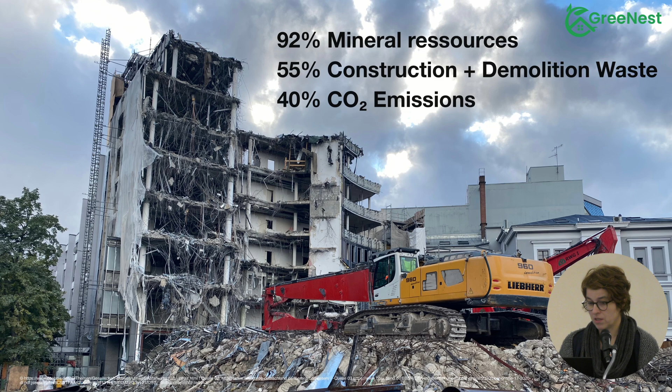Material extraction, the production of construction materials, and heating buildings cause a lot of CO2 emissions. This 40% is the smallest figure, but it's giving us a headache, and we need to bring this down. This relates mainly to the production of construction materials, so we need to find a way to overcome these issues.

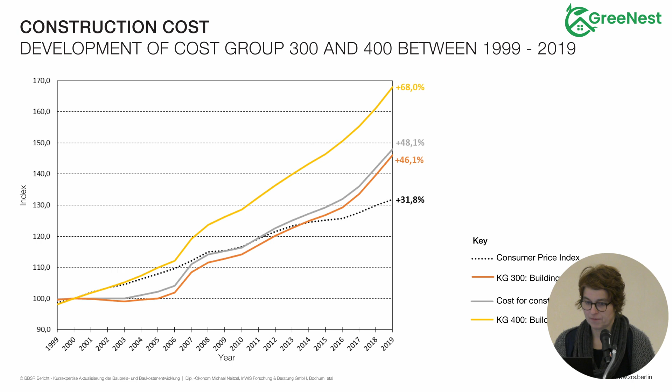We always ask: has the quality of the living spaces increased because of that? We feel it hasn't. We put a lot of kit into our buildings because as architects we've lost some of the knowledge of how to design a building properly. We often design glass facades, then ask the mechanical engineer to resolve the issue of keeping it warm in winter and cool in the increasingly hot summer months. This really concerns us in our office, and we discuss it with our team and with research teams from the university.

What is architecture able to do about all these problems? Through the discovery of oil, we could suddenly construct higher and wider, building these glass facades, but this isn't going in the right direction. Knowing the world population is increasing while our resources are depleting, the question is: how does the architecture of tomorrow look?

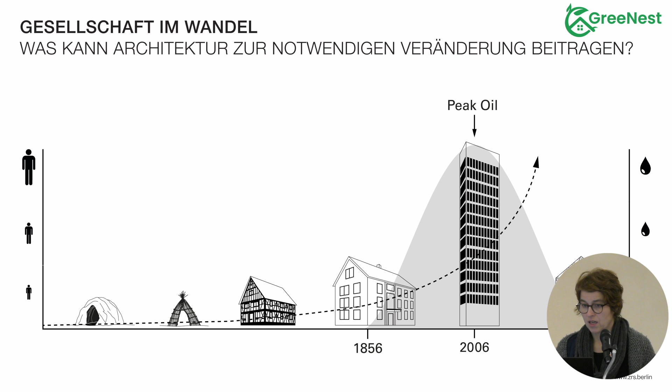So in the office, we're still developing this scheme since it hasn't reached its final form, we try to develop a building system that addresses these issues. This is based on historic construction. It's good to look back in history, because when there wasn't so much technology, and access to material was difficult without all the machinery, people knew how to connect materials together to safeguard and rescue them from other buildings.

The thinking behind this is that we look at historic construction like a wattle and daub house—timber and earth as the main materials—because we know these houses have been quite comfortable: warm in winter, but also cool in summer. This is the construction system we used, translated into modern construction.

We use a lot of timber where we can in the structural support system. We try to avoid basement constructions, because for basements and elements connected to the ground, we always need concrete, and we know the CO2 emissions related to concrete are quite high. So if you avoid car parking spaces below ground, you can do a lot for climate-positive buildings.

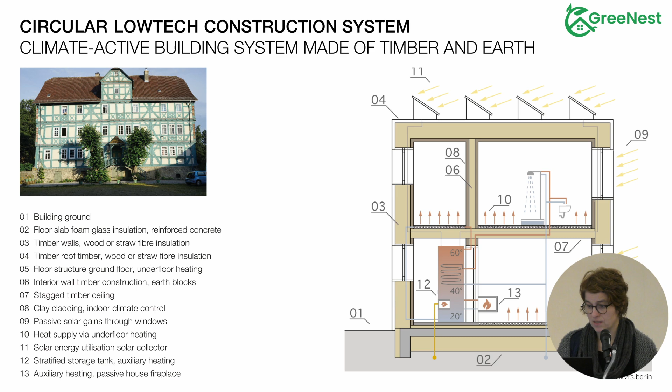We also use a lot of earth where we can. In this building, it relates more to high thermal inertia in the internal partition walls. We keep a glazing ratio that isn't too high, relating to the building's orientation and location—in the south, like Greece, you'd have fewer window openings, whereas in cooler climates where you need more daylight, you can open up a bit more, but these glass facades are really difficult. We also try to implement renewable energy sources to heat our spaces and provide electricity. This is where we come from and what we try to implement in our projects—in some we achieved more, in others less.

It's always a bit of a debate with the clients, and at the end of the day sometimes it relates to cost. So we'll show you different projects, two from the office, and Eike is also showing what we're going to develop in the GreeNest project.

When we started with the design development, we talked to the local authority because we actually wanted to construct the building slightly higher in order to minimize the footprint. But due to urban planning regulations, we weren't allowed to build higher.

So we approached the local authority and said, why don't we think about a building that's dismantlable after time? Because maybe in 50 or 100 years we'll have a different density in the north of Berlin, since the city is still growing.

So the idea behind this overall concept is to be able to dismantle the building if needed. The local authority was quite open to this, because planning takes a bit more time and a bit more cost. But they said, overall we'll gain a lot from this concept, so we buy into this idea. We started first with the overall plan.

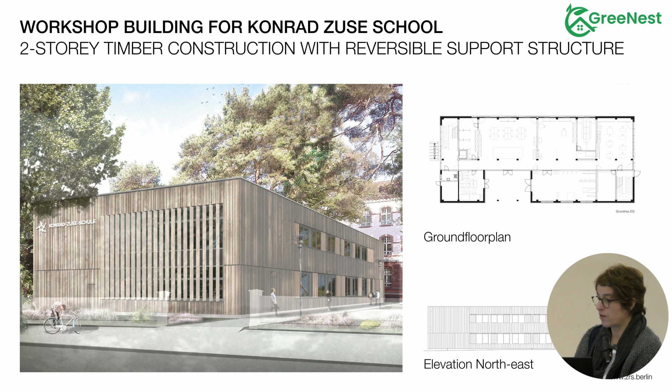For instance, if in 50 years there's a need for more residential schemes, you could change the facade, because the current facade might not relate to residential buildings. We avoided a basement, and had a floor slab made out of concrete.

We didn't manage to use recycled concrete at the time - this was a cost issue. It would have been better to avoid new aggregates, but that wasn't possible. What you can see here is the structural system as a skeleton, and the entire organization.

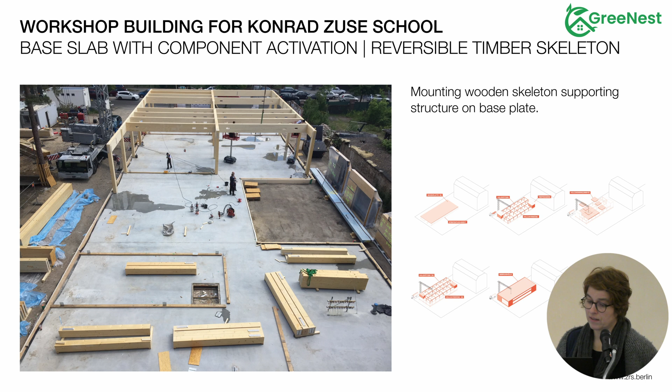The planning was a bit more time consuming, but the assembly on site was really, really quick - the entire structural support system was erected in 20 days. So at the end of the day, it pays off to put more thinking into the planning process, so it can be constructed more quickly on site.

I'll show you a few details that our engineers developed together with us, also inspired by a EU research project. This, for instance, is the connection of the columns.

with a floor plate that you can mount on the ceiling. It's laid out so that we only have vertical loads, and it's just a stacked connection - simple to place together and to detach if necessary.

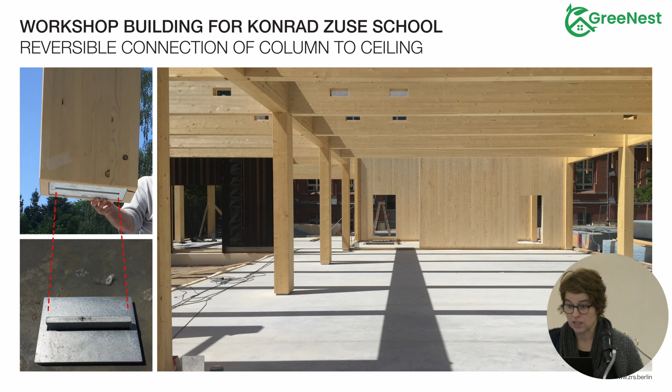The same was developed for the beams, both main and secondary. Again, it's very quick to install on site. You have to secure it through screws, but you can dismantle it again after 50 or 100 years.

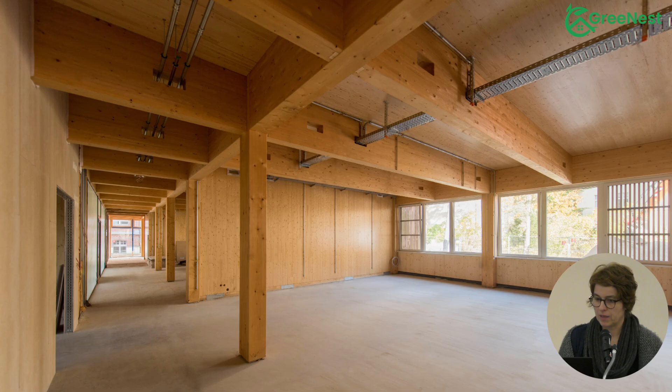We developed a lot of these details in order to be able to dismantle, and despite such reversible connections, we were still able to create quite large spans - the span from column to column is 9 meters, so you can still have very flexible, large-scale spaces.

Also for the facades - and this is what we're trying to implement now in the GreeNest project - we developed a rear-ventilated facade system, again based on timber. We brought in wood fiber insulation, and again you can dismantle the facade, because it's often not as durable as the structural support system, or you may need to make changes to it, and that's also doable.

The idea here with the weatherboard was to use waste wood and to employ the students to mount this facade, but unfortunately we didn't achieve this. It would have been quite a nice idea to bring the concept of reusing timber into the project on a smaller scale.

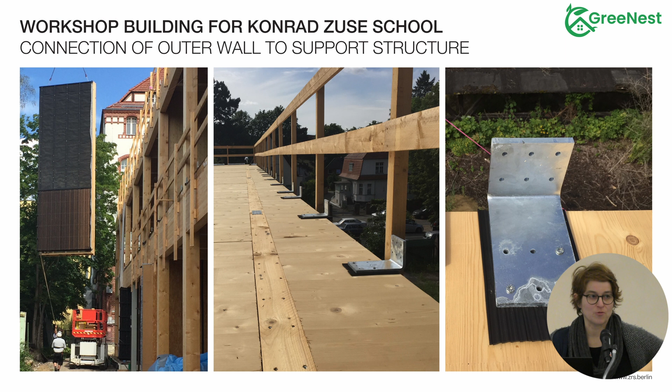This is how the building looks today. We have an appropriate glazing ratio and night time cooling. These timber louvers are screens where you can open the window, which is really good for providing a good environmental climate in summertime. It doesn't overheat, and we can still protect the building from birds or animals entering during nighttime.

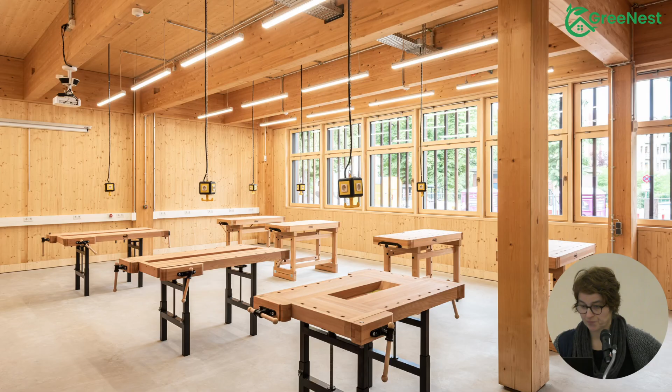This is how the spaces look finally. We try to make as much timber visible as possible. The fire concept is calculated so that the building can burn, but it withstands structural decay long enough that you can rescue all the people in case of fire.

The other benefit is that you reduce the amount of materials needed for additional cladding. In addition, we have a vapor active material, as timber is able to store, absorb and desorb moisture. So the building was actually constructed without a ventilation system. This is really the benefit of exposing timber and using earth in such projects.

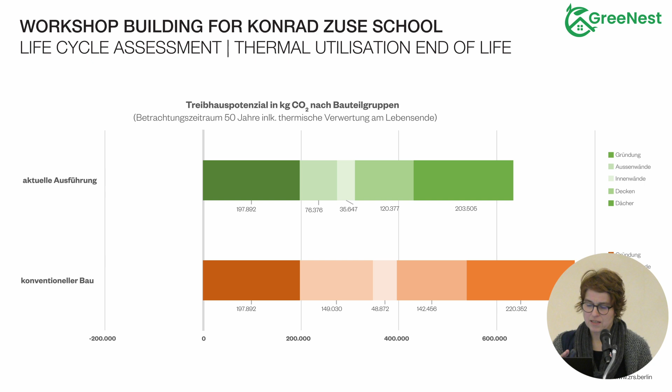You can see that the overall performance of the timber building is not that much better in comparison to the other one. But if you consider that we can dismantle the building elements and not burn them, but reuse them and store the carbon for another cycle, or at least keep the building much longer in the first instance and then reuse it, we have this carbon storage saved. This almost makes up for the CO2 emissions we still emit from needing a concrete foundation. So this is the thinking behind it, and this is how we hope to promote such constructions in order to bring CO2 emissions down to zero.

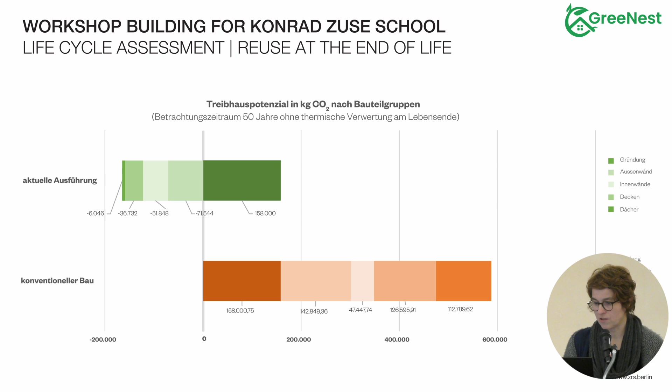So Eike is now explaining the next two projects. Okay, so we come to two more projects.

One is called Holz-Ziegel-Lehm, meaning timber, brick and earth as construction materials. It's a research-based project built for the Berlin-based communal housing association Stadt und Land. We have a huge consortium for the design team at the core, and then a research team from three universities, with a little bit of a research fund for that.

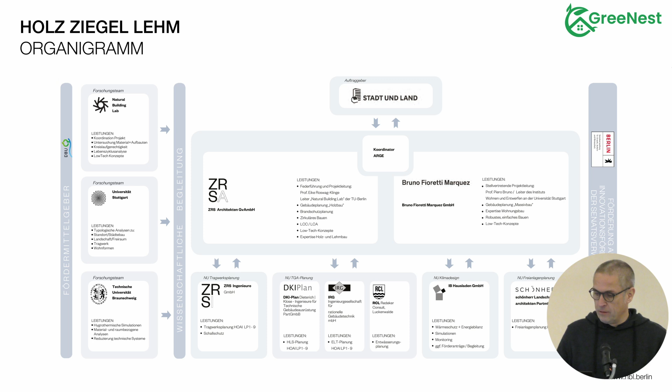We started in the design phase, developing these projects together with the design teams. ZRS was the designer, together with Bruno Fioretti Marquez, also a Berlin-based office who are very experienced with housing and brick buildings. And we, as a team, are very experienced with earth and timber.

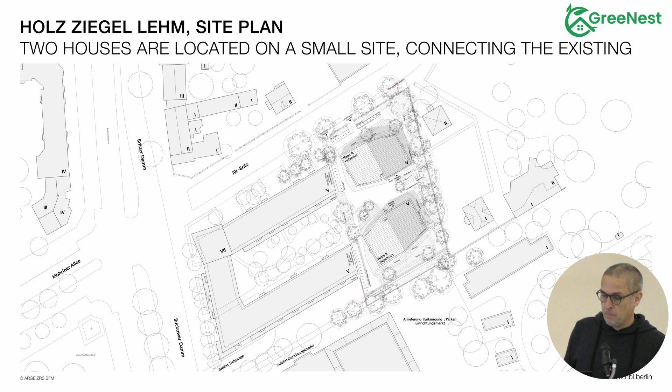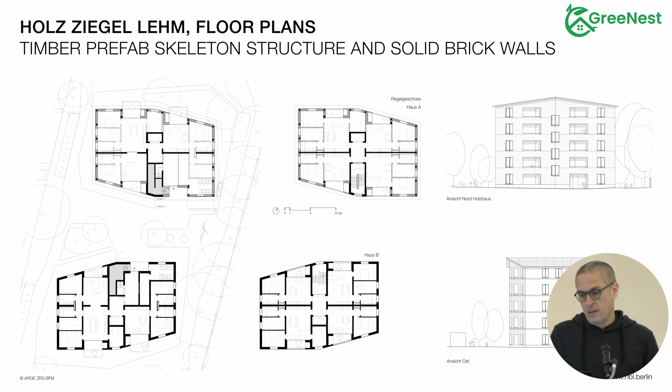We always promote our low-tech system, as Andrea showed you, from earth and vapor-active timber construction. So we're just comparing these two systems. In these details, you can see on the left-hand side the timber details.

So we have a CLT ceiling, we have laminated beams and column structure, and then we fill it in with natural fiber insulation and have an outside, back-ventilated facade.

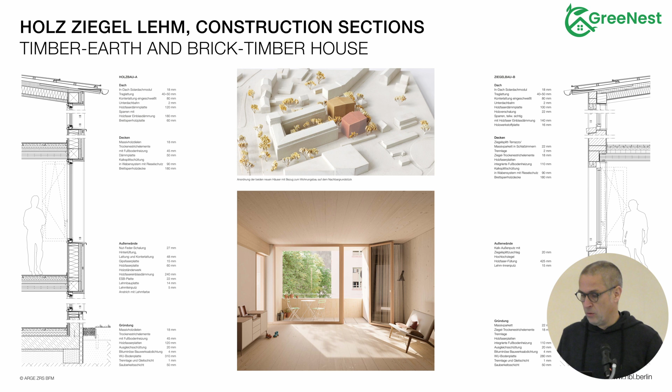And we have from the inside earth plastering or earth dryboard panel to have the cover done. On the other hand, you can see the structure as we started it in our design phase. It was a brick facade or brick outside walls, and then a timber CLT ceiling. But due to construction issues, design issues, and also cost, we decided at the end to do the ceilings not in timber, but in brick and concrete mixed construction.

So the most important thing is that we are trying to reduce our resources and design a kind of circular construction. And we did start our LCA calculations, and we compared a number of systems.

So we have three timber systems. One is the most natural based, H1, the first layer. Then we have one caused through nowadays regulations, so we have additional claddings with gypsum boards because of fire protection. There's a law, I could talk about this very long.

And then we have the lowest one, which is not a timber facade but a metal facade, because the fire brigades said we cannot enter the building with our standard safety technology. So we don't have a timber facade, what actually could be possible, but they said no, we don't like it, and so now we have a metal facade for that building.

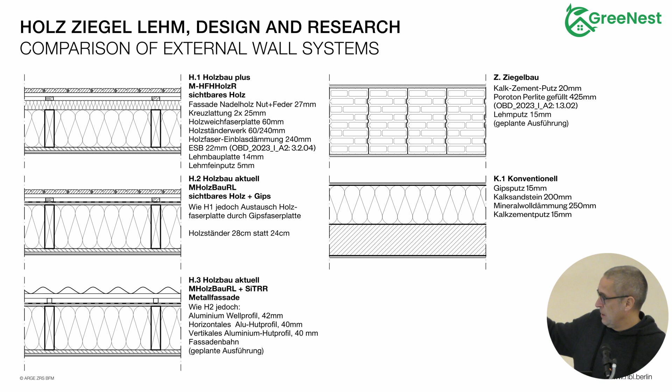And on the other side you can see the brick, which is filled with perlite—it's a light mineral used as insulation material. Then the standard wall is our benchmark, it's a conventional one: Kalksandstein, lime sandstone, with mineral wool as insulation and concrete ceilings. And then we did calculations.

Actually, Julian could answer these questions because he's doing the research on that project. We start from the left, that's our conventional building, and we have two different calculations. The dark one in front is module A, the installation phase of the building, and module C is if you take down the building.

So you book off the CO2 again. You can see the standard building is for sure the most emission-heavy building, which in the erection phase is about 250 kilograms per square meter in total.

Then you have the brick building with brick ceilings and a wood roof, so there's a little bit going down below the black line, the zero line—a bit of a sink of CO2 just from the roof. Then the next step is very big, that's the brick and timber construction, like the traditional Berlin houses, which is not built—the second one is going to be built.

And then we have the three timber houses. There you can see we can start with the best one on the right-hand side, offering a deep sink of 100 kilograms CO2 per square meter if you sum it all together.

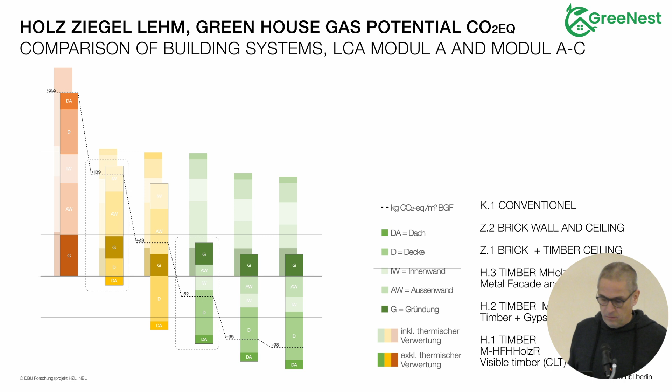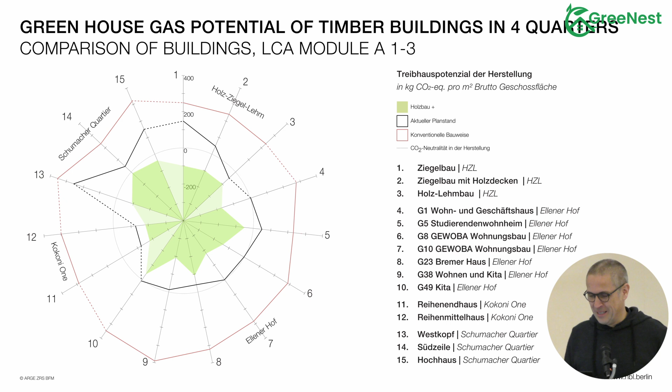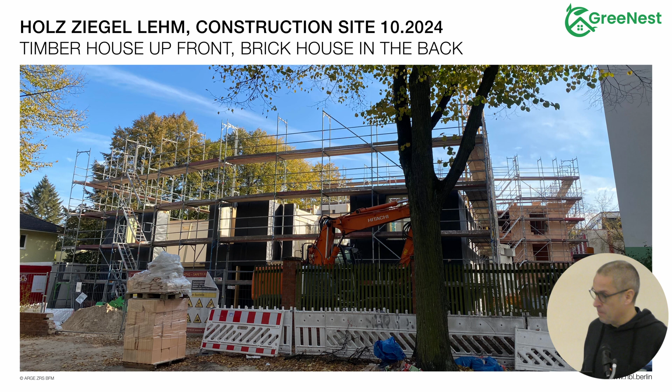Now we're going to show the projects a little bit. There's 2 stories of the timber construction. It's prefabricated elements. Unfortunately the slab took us a while to construct, so the carpenter had time, like 2 or 3 months, to prefabricate the whole building, and then they very quickly started to bring it up.

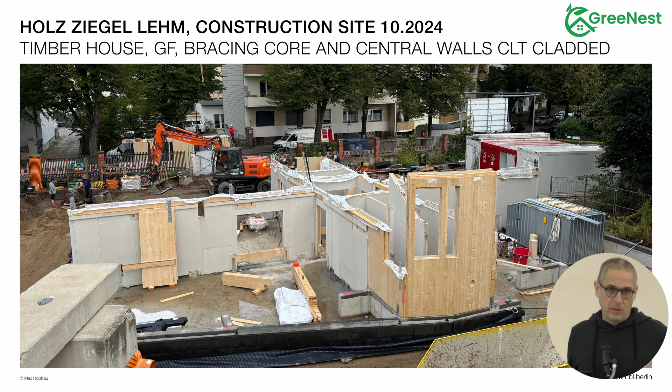So in the center you can see the cross-laminated timber structure giving the solid static of the building. Unfortunately at the time they all have to be cladded with gypsum, what you can see here already. Like 2 years ago we could have built the whole thing in timber without any cladding - that's what we did in an older project in another case. And then the high insulated wall of timber frame is covering the whole structure and giving the shape.

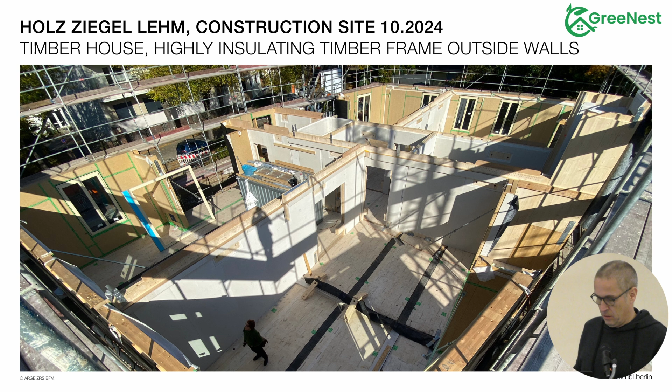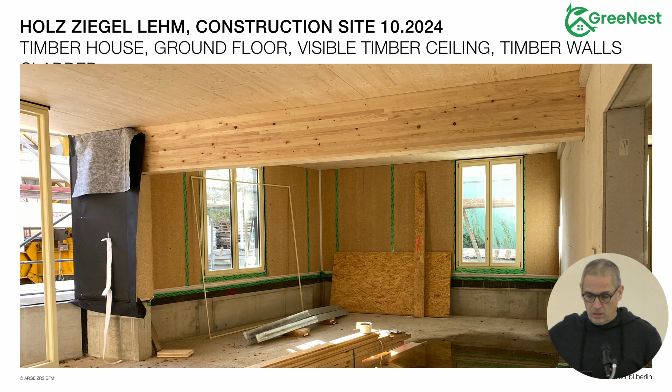So that's the kind of infrastructure of change we would imagine having for the future. That's from inside, that's the ground floor. There's a piece of concrete to come out of the water level, and then the rest is the timber structure. You can see still the covered walls in the center, and then the timber ceiling that is visible in the future - that's how it will look at the end. We have earth plasters and earth dry boards on the walls, and timber ceiling and timber flooring.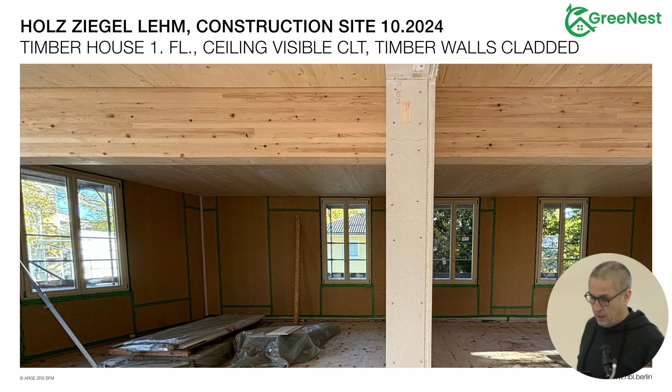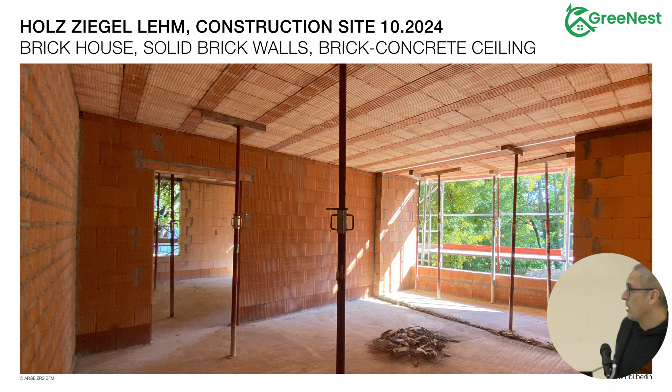And in comparison, that's the brick house. So it's a complete reddish house, completely built stone by masonry, a totally traditional way of construction. It's very nice to see how to compare this prefabricated installation and the masonry works here. So they started something like 3 months earlier, and after 2 months of construction, now our timber building is quicker done than the brick building, which will be finished in January.

And that's just a top view. Here you can see the CLT ceilings on the right-hand side and the red installation of the brick concrete ceiling on the other side. I think I have to speed up a little bit.

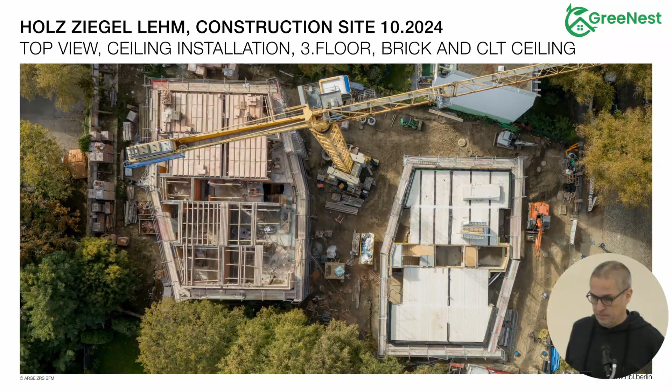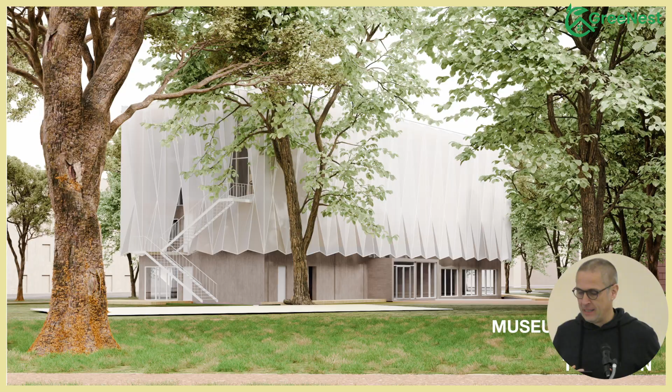So that's our pavilion in Berlin, what Sina is working on since how many years now? I think 5 or so. That's a museum, a transdisciplinary place where we can connect our research with society. And we entered that project at a certain point and tried to bring in all our research questions and to build like a real life lab, to build what we are developing in research in parallel. We don't have a long time of development and then go into practice.

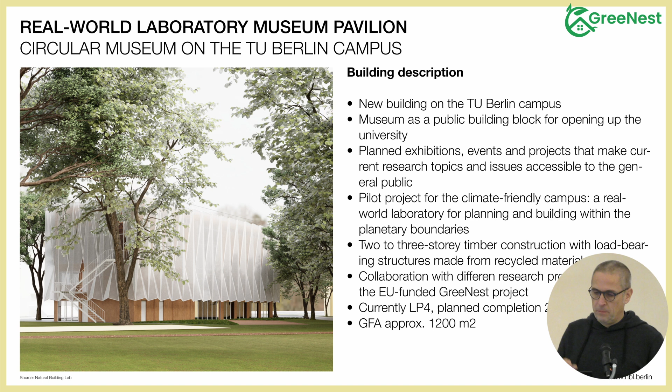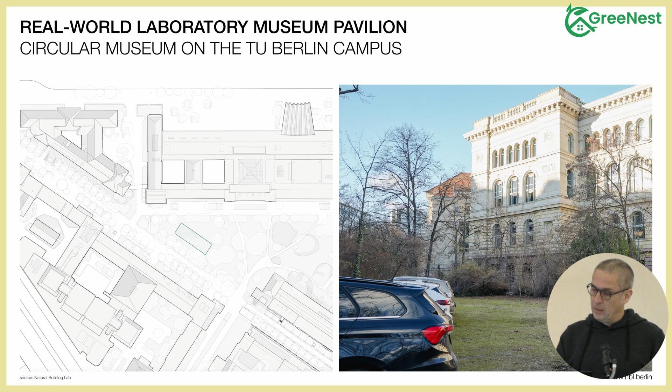So we then decided - that's the place where it is located. It's in a small parking lot behind the big main building of TU Berlin, in the center of the campus. The main question was to build the whole building as translocatable. So we try to build the structure in a manner that we can take it apart and build it up on another place, with 100% of our materials. So that's, from our perspective, the highest level of circular construction.

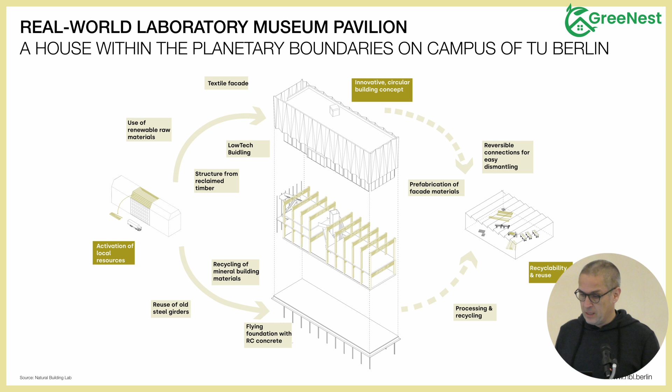The whole thing is a low-tech building, so it will be without any ventilator, meaning there will be no ventilation systems. We designed climate-based design for the building, and this textile shell will support our climate design.

And that's how it will look. We will have a 12-meter span of beams made out of waste wood, and additionally this flooring, which we'll come back to later. Another research question here is that we have a recycling flooring.

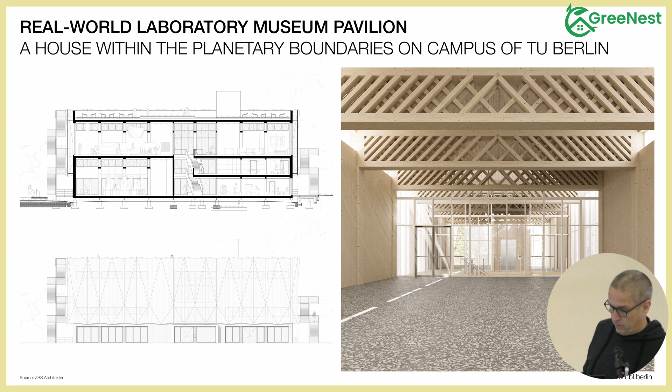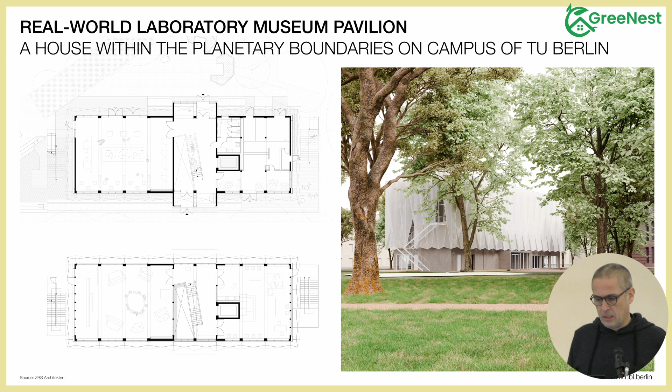These are the two floors. You can see these main halls here, three big halls and exhibition halls, the cafe on the ground floor, and on the first floor in this separation we have a bit of office space, shown here in between. So it's around a 1,200 square meter building. It's not a pavilion, it's more like a solid building.

And we changed the whole way of designing, so we are always working on an eye level. We developed the situation through the hands of the students and in interaction with the designers, with the research partners from all the different research perspectives. And then we handed over the thing into a general designer team.

Here you can see a standard design phase where we have the development phase on the left-hand side and the concept design on the second phase. That would be the standard. So we involved our students with a lot of studios from landscaping, civil engineering, exhibition design, etc.

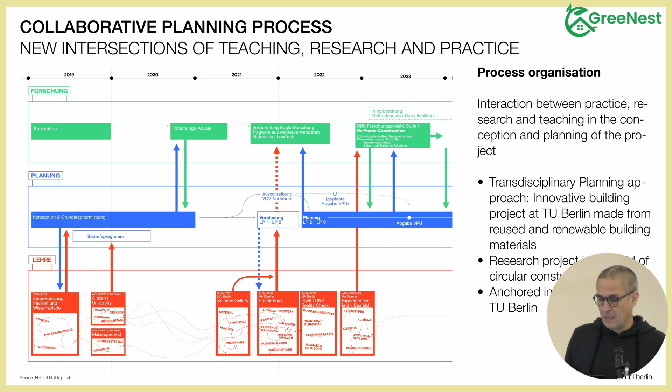We developed this concept design, and in parallel we started discussion with our research teams working on the TU, and we also started going into acquisition to get research budgets, to have this frame of safety around the construction phase, so we are able to design something that is not possible today.

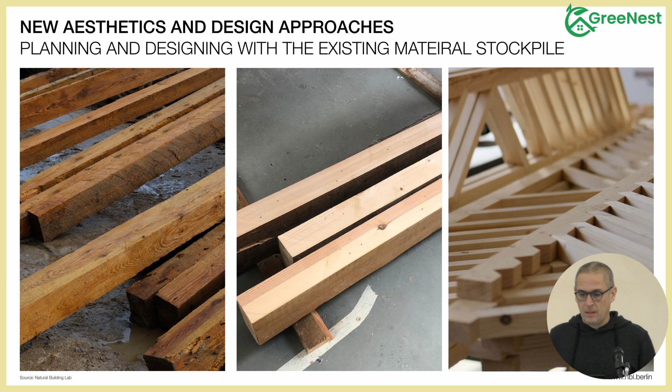From the early beginning, we started collecting timber and experimenting at a 1-to-1 level, starting with the cleaning and repairing process. We did 1-to-5 samples, then our own studio did 1-to-10 samples. All these models are 4-meter wide spanning models.

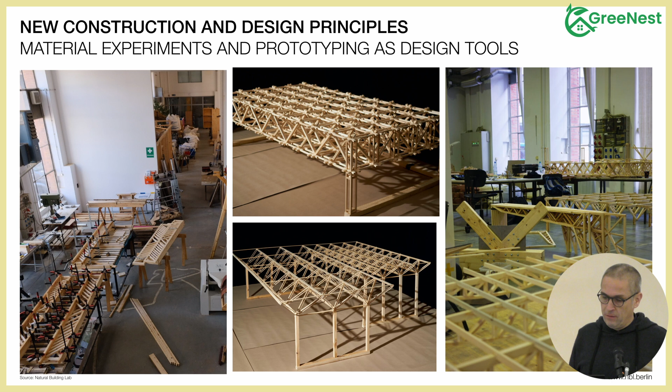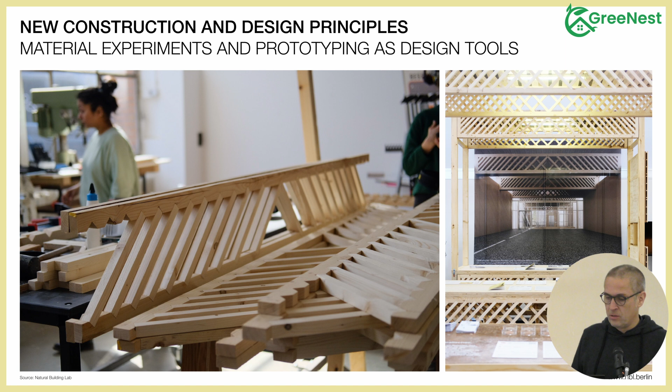So that's how our students then developed these structures. Here you can see the final product, which was then made in a separate studio where we brought all ideas together, and then handed over this final design as a concept design to the design team.

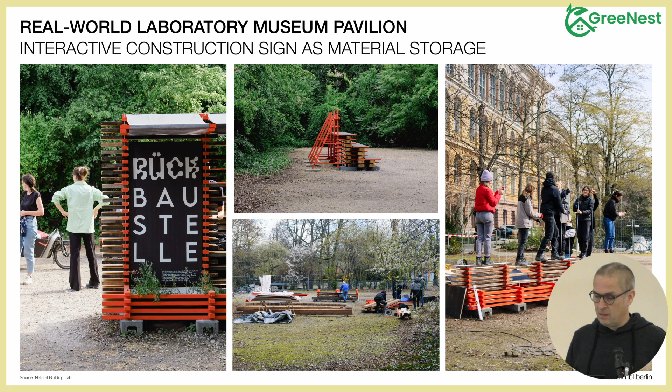In parallel, we continued collecting timber and experimenting with how we can get it, how it works logistically, and everything we have to do. We developed a storage area for timber on site, where we can offer and discuss information with people from the university, and have a place to rest there at lunchtime, etc.

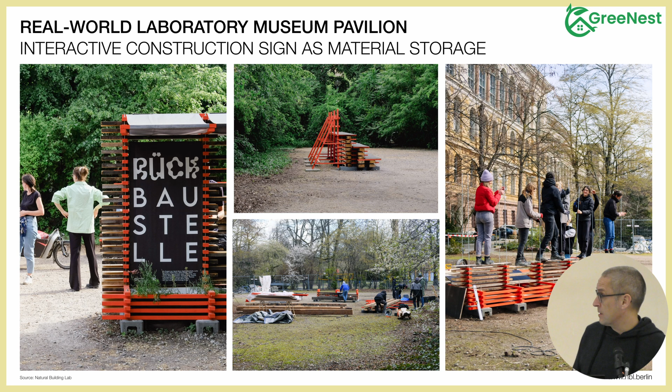Then we started another phase recently where we are scaling up. Sina found a way of funding from the economy senate in Berlin. They're offering to finance startups, usually thinking about digitalization, drones, and things like that.

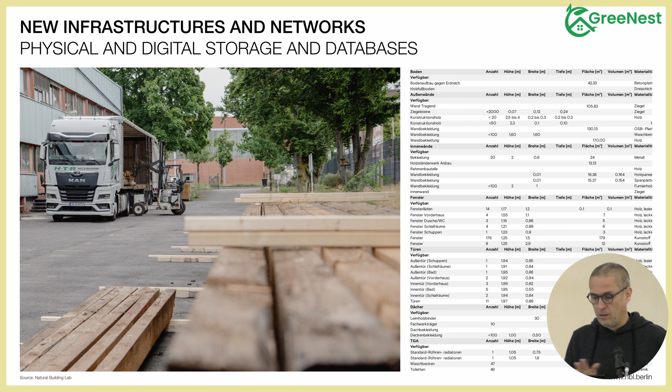We thought we should also bring in the recycling or reuse process from construction sites as a startup, as a real lab. So we won the first phase, and scaled our collection of timber. We professionalized our procedures for how to collect and document the materials, and we brought in a lot of material that we are now processing, some of which is already processed.

So now we are also going to start producing the first glue lams from waste timber with a factory in northern Germany.

And then there's the research topic again from GreeNest in Switzerland, which will focus on a screed made from earth, which is not currently allowed to be used in Germany, and represents a new way of construction. So that's something on a very early technical readiness level, but we try to implement it in a protected area in our pavilion.

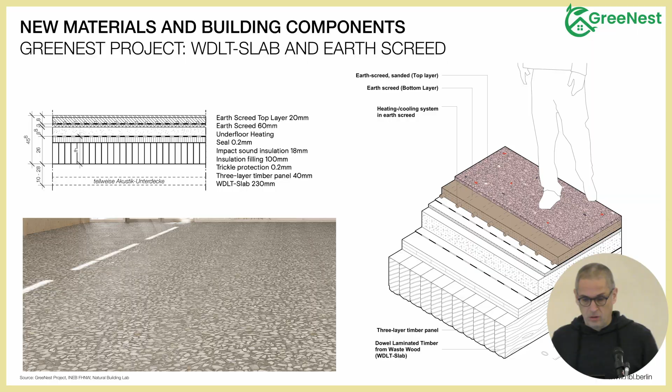It has a little bit of a risk to fail, but that's something we, as a university, would accept, just to advance our research and make it move more quickly. So now I'm handing over to Andrea.

So just a few things again about where we are with the construction of natural building materials, to give you a bit of an outlook or perspective. With timber, we are already quite advanced, I would say. There's, in a way, a race going on - every country tries to construct higher.

I'm not sure if this is the way to go, but it shows that timber is a really good element for construction, and to convince people to use it, I think it's important that you can prove that you can also design high-rise buildings.

So we did the left one, this competition entry that we didn't win. The building on the right is at the moment being constructed in Hamburg. It's going to have 18 stories, 65 meters high.

Fire regulation is always the limiting issue, in the sense that you need to cover the timber in case of fire, that you have a non-combustible material. The concept of burning pieces of the timber down is not always accepted, but there's a lot you can do already. And timber is a very good construction material when it comes to circular construction, as it's easier to develop reversible connections, and in addition, as we heard, it stores carbon and functions as a carbon sink.

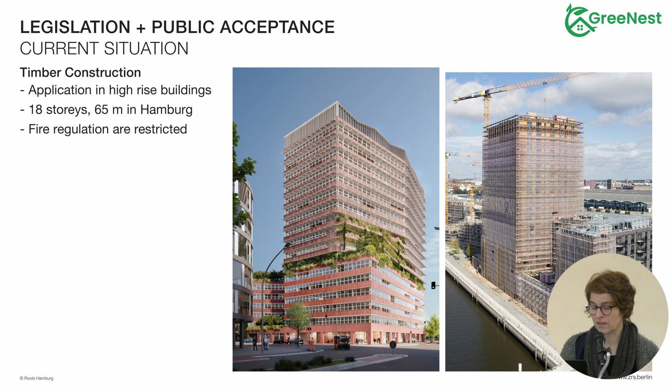Earth construction, we didn't show you too much. I think this will become part of the second lecture. There's a lot going on in Germany as well. We have four product standards, which are very useful for architects because specifying materials that are not standardized or not controlled is very difficult in terms of liability issues. We have a new standard for load-bearing masonry, which is very good.

So we are able to construct, from now on, four to five stories as a load-bearing construction in earth blocks, where we hope that this will help to overcome also conventional construction, because again, earth is a circular material and the embodied carbon is very, very low.

The next one to come, and this is for architects always the more interesting construction, is rammed earth, as we can see here on the picture. This was for a long time the largest construction in rammed earth in Germany. The walls are 10 meters high.

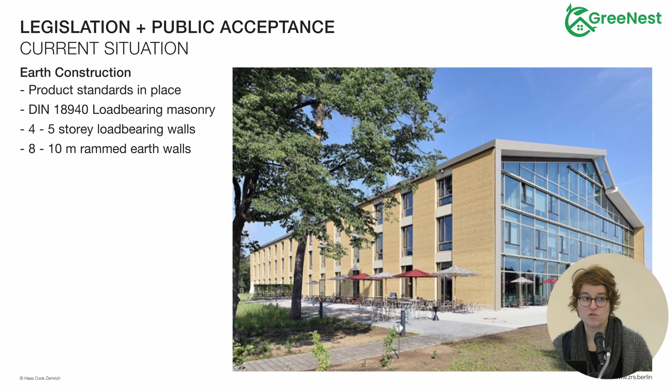It's still not standardized, so you would need an application in a single case, which makes the whole process of application obviously a little bit more time-consuming and costly. But our office is also working on a new standard for rammed earth construction, so this is going to be very interesting as well, I think.

And the last one, we know that we also have to reuse building materials in order to bring emissions down. These are just a couple of images again.

We have guidelines coming out anytime soon for load-bearing elements in timber and in steel, because in a way the fear is always, if you dismantle a building, what's the structural integrity of the building element? Can you apply it again, or has there been a damage or whatever? So we need to have certain guidelines, standards in place in order to assess them.

We've done it on the left-hand side. This building was dismantled. We've done structural testing in order to prove that this timber is still reliable, but this obviously is a very time-consuming process. What's also very interesting, and I think Switzerland is really well advanced in Europe in that respect.

There are a lot of clients who take over the liability issue, which is always a question. They buy into this concept. Then we have also craftsmen that say, I know what I do, I guarantee for my work. So they don't guarantee for the building element they used or reused, but they guarantee for their work, which we as architects like a lot, because normally you should be able to guarantee that the construction is lasting.

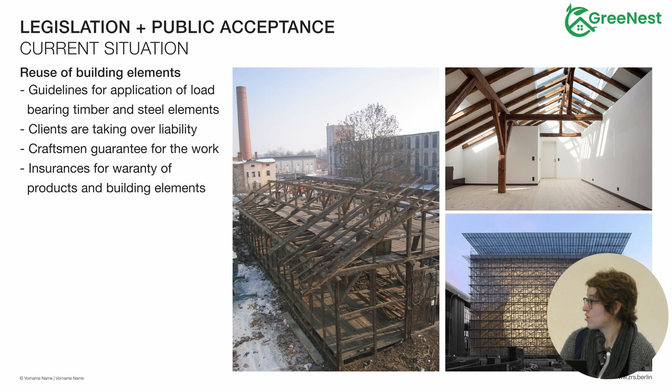And also the entire concept, or the understanding of acceptance, that's why I put this EU building, some of you might know. It's a very, very nice idea. All the windows that you can see here in the second layer of the facade come from all the different member countries, and some of the windows have been 250 years old, so they really try to promote this construction of reuse again, and I think there's a lot possible already, and there are a few obstacles to overcome, but I think we're going to achieve this in the very near future. Thank you very much.